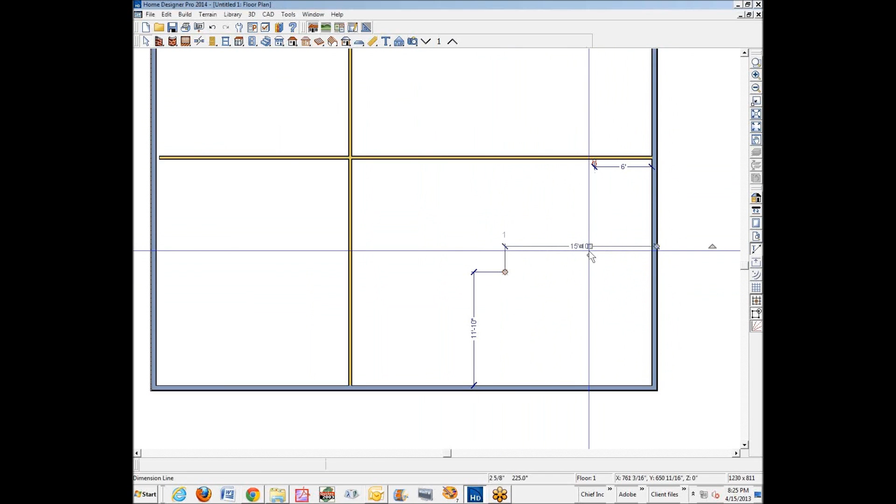I've just been playing around with it thinking about what I might do the video on. I'm going to zoom in over here and go to the dimension tools. I don't use the drop down, I use the point to point or end to end dimension tool here. You can see the little precursor there, the little triangle that shows me I'm on the center.

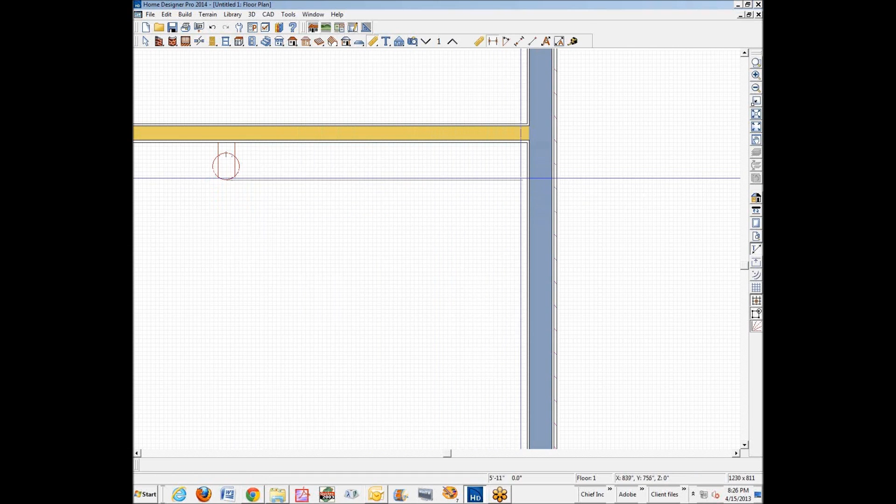I'm going to dimension - okay, I like the dimension to the outside. I'll just move it manually to the inside. Just the way the dimension tool is programmed.

You can see I preset that to 6 feet. You just click on the electrical item. If you want to move it to 12 feet, then you just type in the value and hit it, and it moves it to 12.

Like Alovia spoke of, you can click on the electrical item and select it, and then in Pro you have in the Edit toolbar this tool here, Transform Replicate, and you can move that selected item and copy it. Like the code is, I think, every 6 feet, something like that. Don't hold my feet to the fire if that's not true.

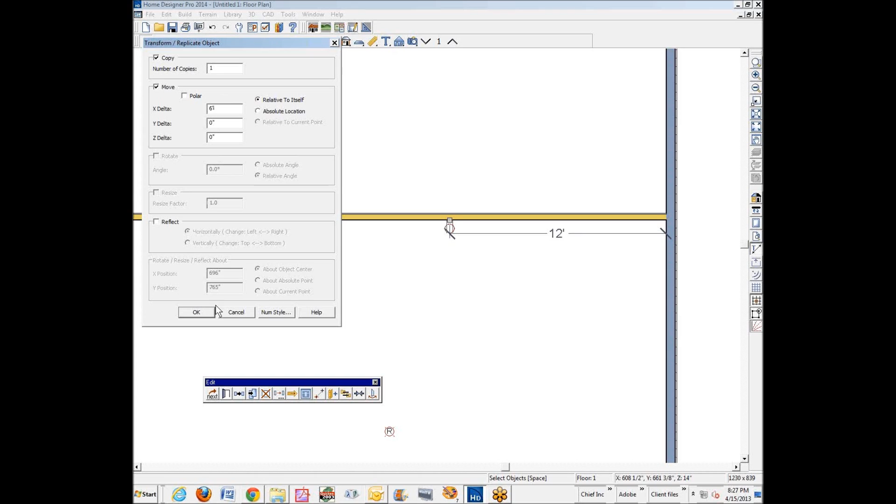But I'm going to make one copy and move that copy 6 feet - actually, I want to move it minus 6 feet. Yeah, and it moves it 6 feet to the left.

Now let's check the veracity of the software. We'll just move that over there. Yeah, sure enough, it's quite reliable and accurate.

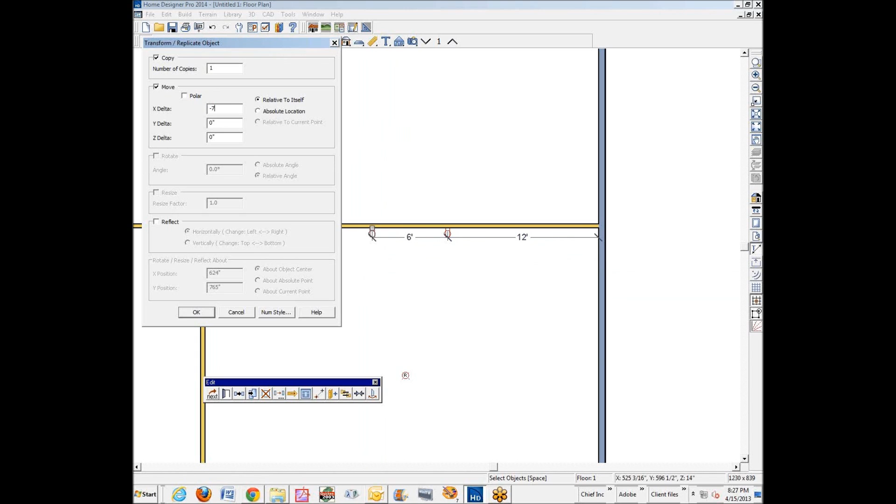So you could take the next one and make a copy. You have to check that, tell it how many copies, and then tell it how far, minus 6 feet, that's minus 72. We'll use inches this time. There's another one.

Of course, let me just get rid of these. Now for plugs, I normally just use the automatic plug thing. Let's see, I think it's under electric, and this one here, and it'll place.

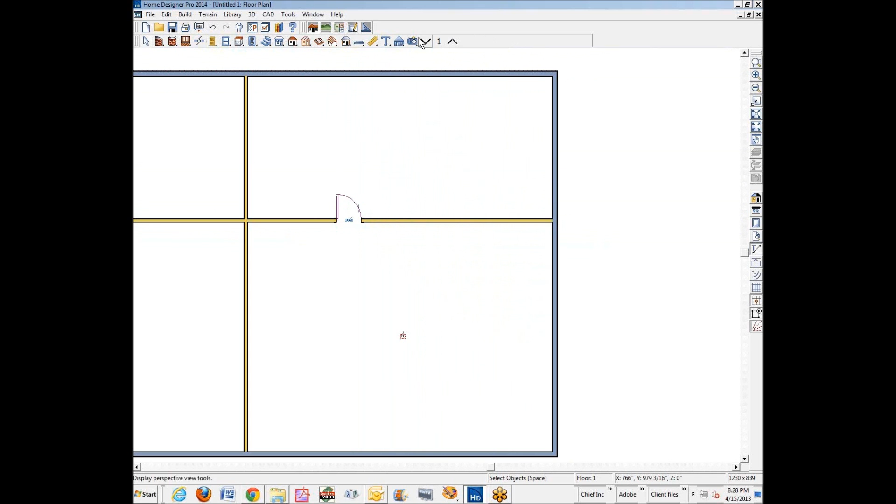Oh, okay, so there's no doorway. My bad, put a door in there. Now it'll probably work, I didn't know that there was that limitation. Probably a reasonable one. And it put them relative to the openings in the wall, and it put them in by code, by IRC code.

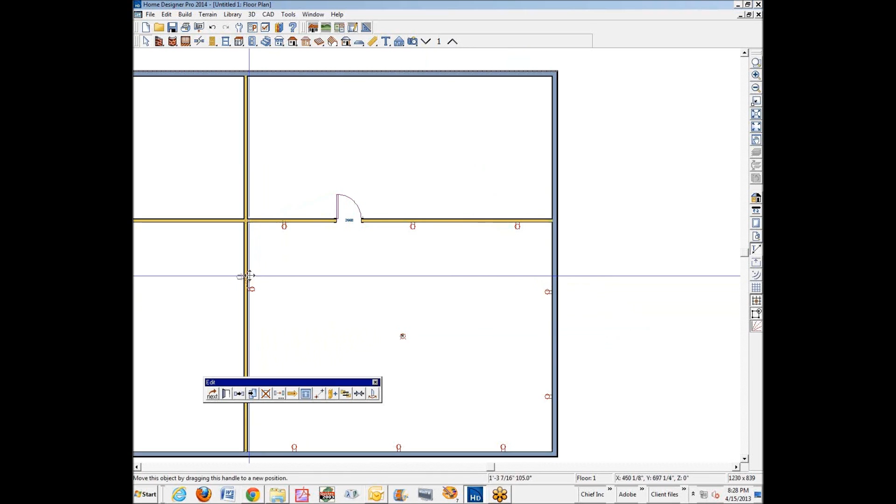Now, when you're doing electric plans, I'd recommend that tool. It's a time saver. And then if the outlets go in not exactly where you want, well then you can just move them to where you do want. Just keep in mind that tool lays them out by code, and if you alter anything too much, you're going to have to.

I told you to use the arrow keys, and I forgot in Pro the arrow keys don't work like they do in Premier. My bad.

So now, if you wanted to put this ceiling light in the center of the room, how are you going to find the center? Well, the easiest way, like Alovia said, and I agree, go to CAD Tools, draw a line. I'm going to turn off angle snaps just for a moment, and then draw a line from there to that interior corner.

Then another one - see a little red box that shows me that I'm on an intersection. There's the center of the room. That works really good. And then electric items like to snap to CAD lines. That's another reason why it's a really good idea to use them.

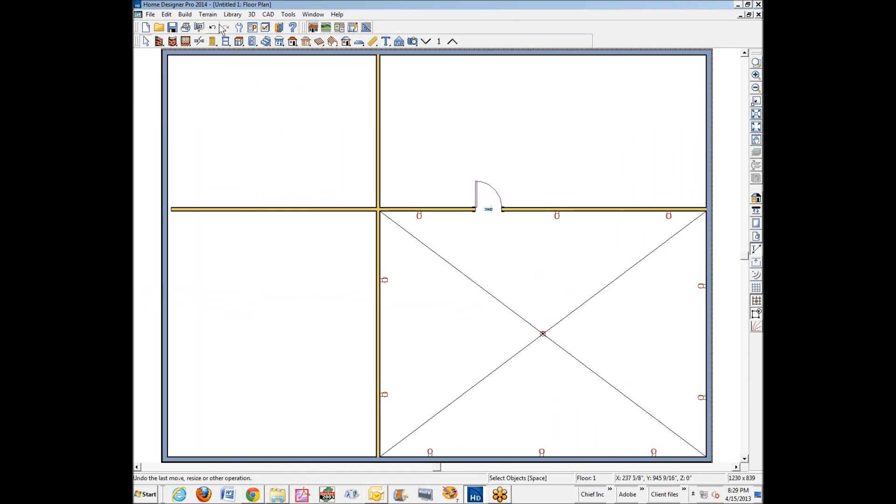Now if you wanted to lay out a room in a pattern, again I'd use CAD lines like Alovia recommends, and I would use the box tool here, rectangular polyline. You can snap it on a point and just drag straight down, and then let those snap on the corners - well, it's all right.

I'm off a little bit. I guess I need to - no, I guess my room's not perfectly - that's fairly close.

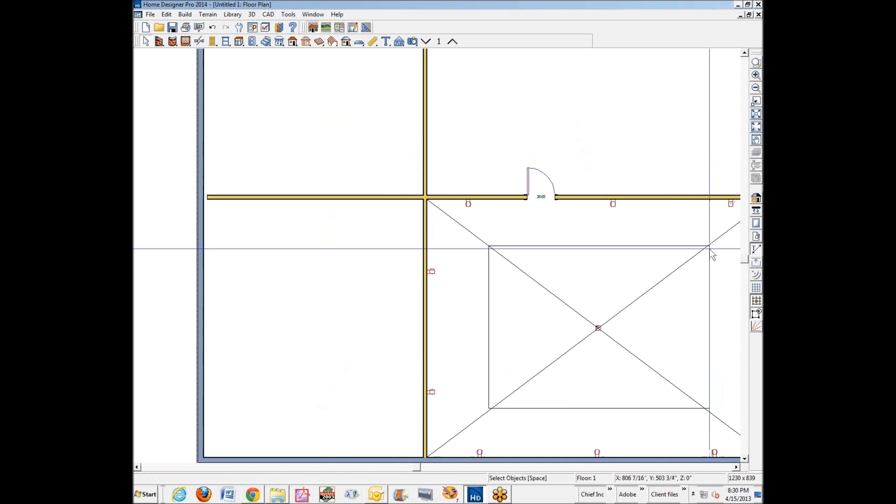Get this exact and snap it right on. See that little red snap precursor? I want to get it right on the line. There.

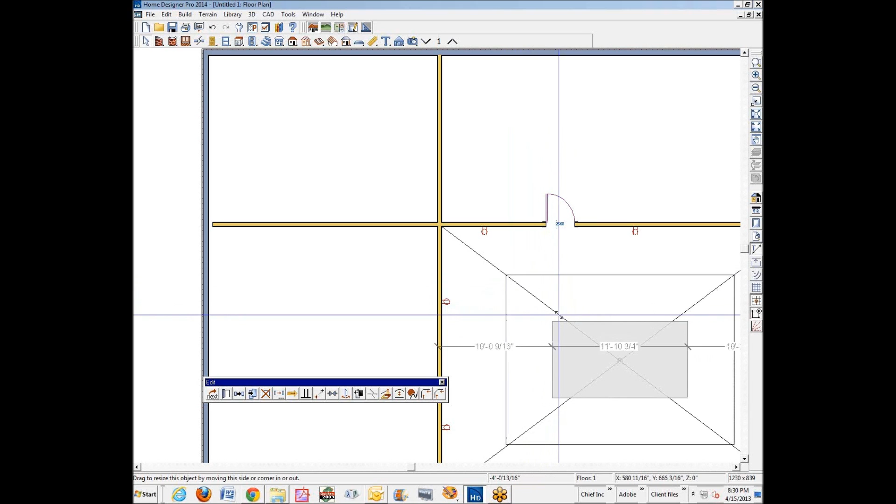Well, it's not perfect, but it's a quick way to lay out 4. Of course, I'm going to press the C key and then drag inward, and that concentrically moves the object. I'm just holding the C key down and grabbing a handle like that.

This is another way to do it. And you can take this one here and snap it to the corner of that polyline. Let the copy key - when you have CAD lines laid there, it's very easy and quick because they'll snap to CAD lines and CAD nexuses.

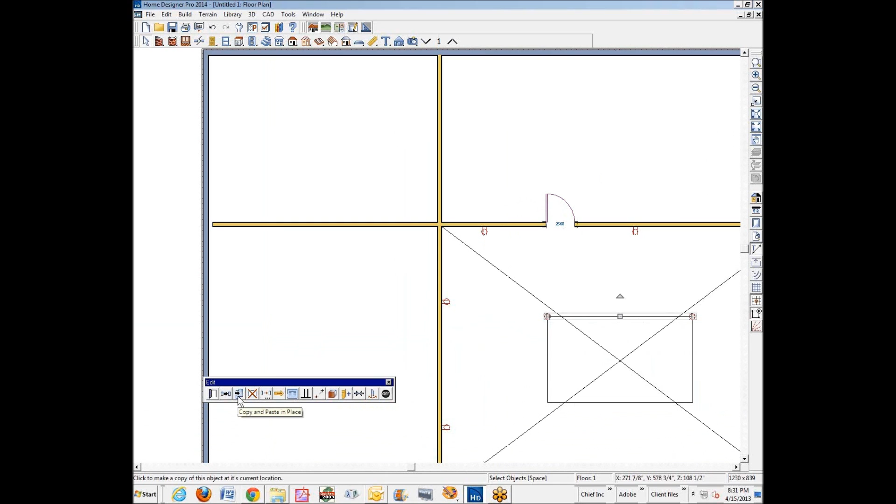Now I've got that group. I'm going to copy it in place and drag the pair down, let them snap on there. There's a pattern of 4.

Along with the CAD lines, as I mentioned earlier, you can use your dimension tools if you want to get it very precise and do an electric plan to show your electrician.

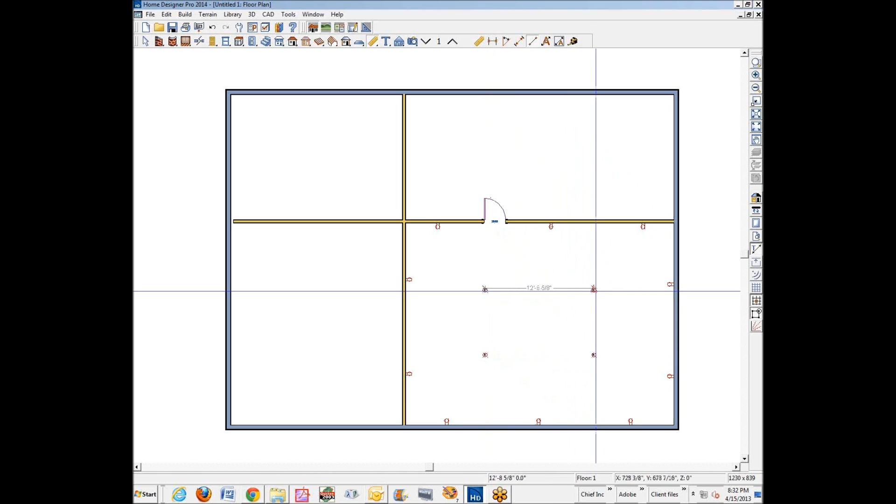Let me point out something about plug locations. The electrician lays them out by code, and on plugs especially, they're mainly to show the electrician where you need specialized things. You don't need to show every outlet because they would lose their license if they did an electric job and signed it off and it wasn't properly by code. You don't have to sweat blood over these electric plans because you're not licensed to create one anyway.

But if you wanted a dedicated circuit here, you'd want to go to the text tools and tell the electrician that right here. Now my arrow didn't work. Huh, it's not working. Okay.

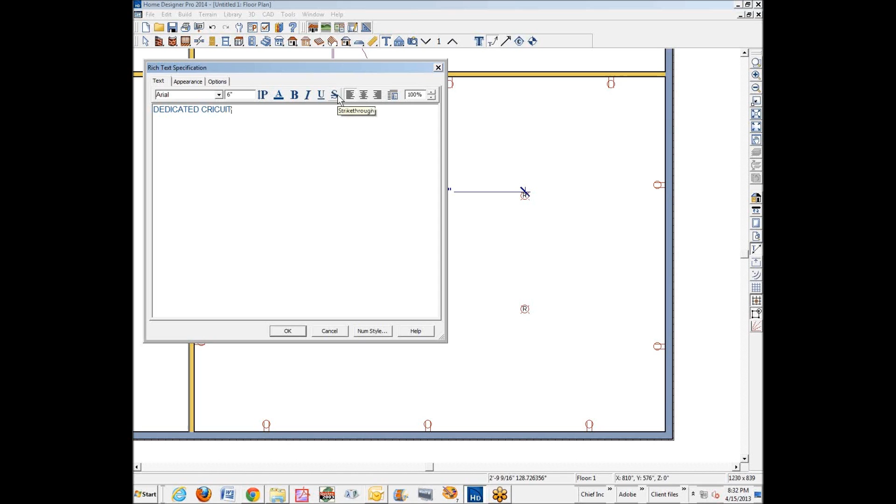Do all caps. I think I spelled that right. There's no spell checker? Well, forgive me if that's not spelled correctly. I'm spoiled, and I'm also stupid. Oh, there's the arrow. I didn't think the arrow formed right.

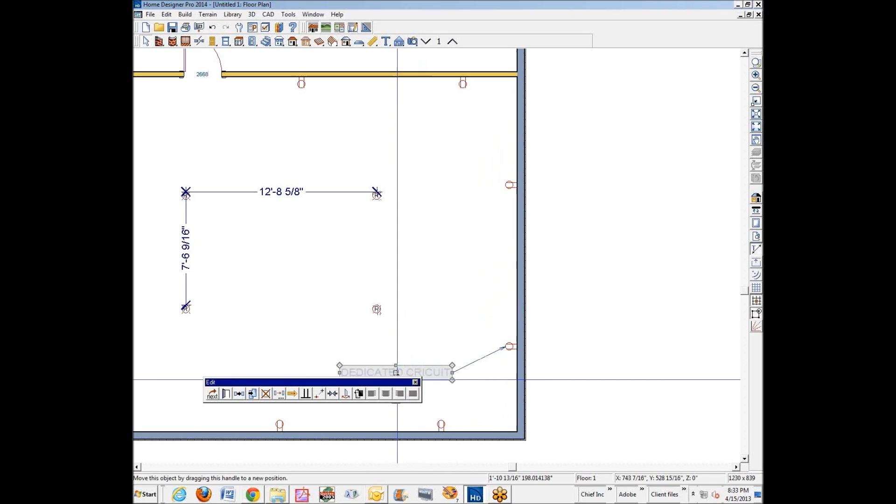I'm going to put the arrow there, and just for drafting purposes, I'm going to drag that down, click on this, use the break tool. I usually break mine into... well, I'm having a little trouble here. Well, I guess maybe that's the break. Okay, as long as I get a break in there, I don't care.

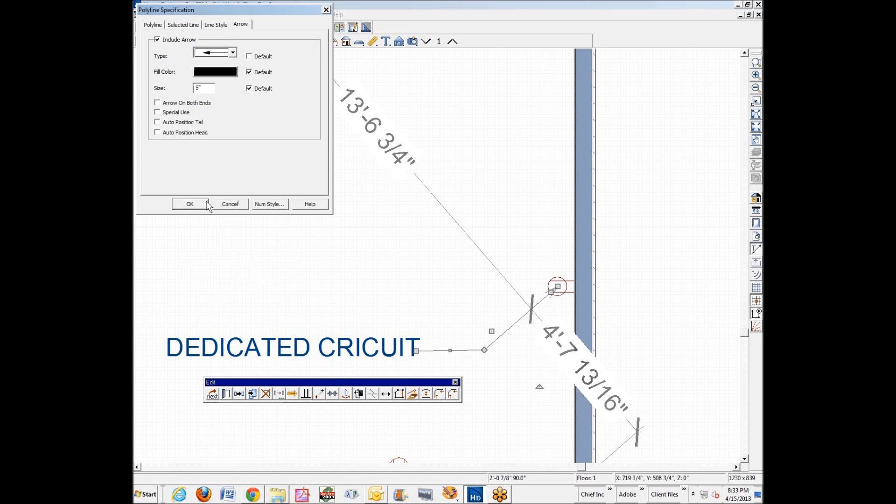I commonly will have a straight leader and then have the angled one go to the item. I don't like the arrow type, I'm going to change it to that kind of arrow. And also as a draftsman, I wouldn't leave this leader slanted like that. I'd use a parallel tool and straighten it up. That looks better.

So really you don't need to put your plugs in except where you need more than one or need a particular kind. Add some text and let your electrician know that's what you want. He'll lay everything else relative to that by code. Okay, let's continue on here.

I'm going to click on this dimension and drag and go to the wall. And then this little tool here, you left click and drag, create a new - well, it didn't work. Let me get that out of the way. Sometimes when things don't work, you just have to try again. I'm just not getting it.

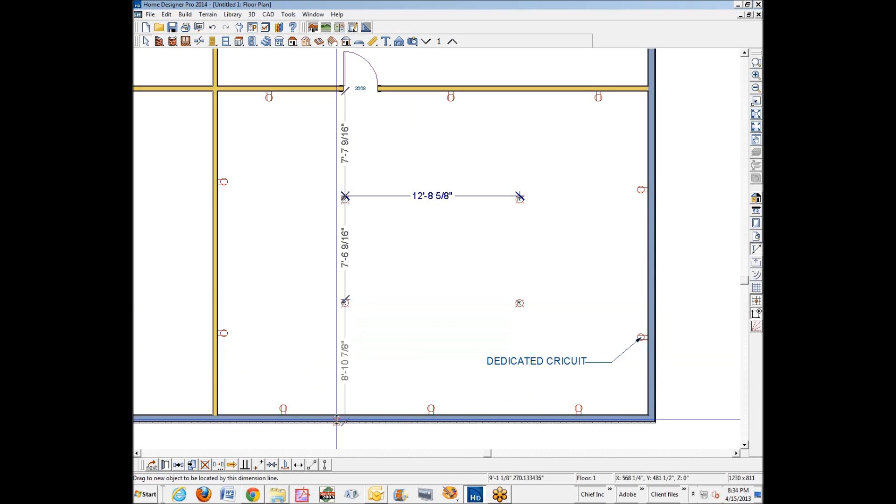It probably wants me to drag to the outside, which I don't want to do. Okay, it kind of worked that time. It went to the framing instead of the surface. I want to measure it from the surfaces. Okay.

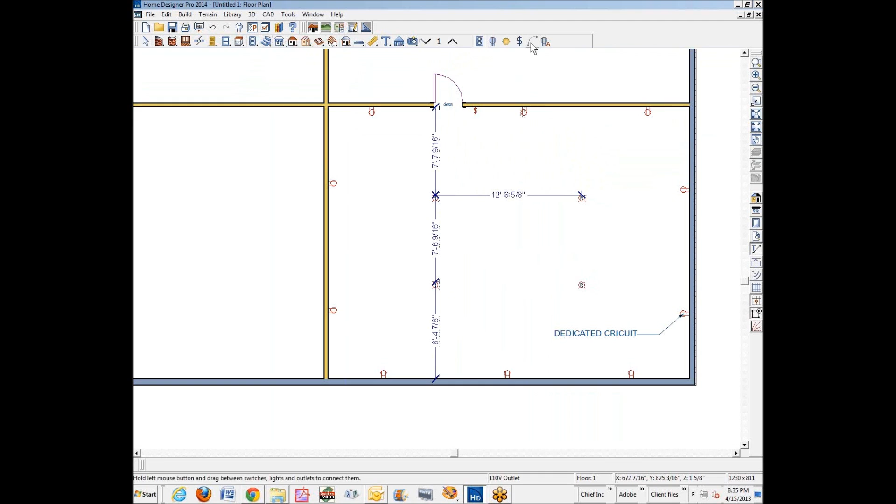So you can use dimensions, you can use CAD lines and CAD polylines, and electrical items tend to want to snap to that. I guess I should show you a switch. We'll put a switch over here by the door and wire it. Whoops, I lost it, I hit the space bar. Shouldn't have done that. We'll wire that to this circuit here.

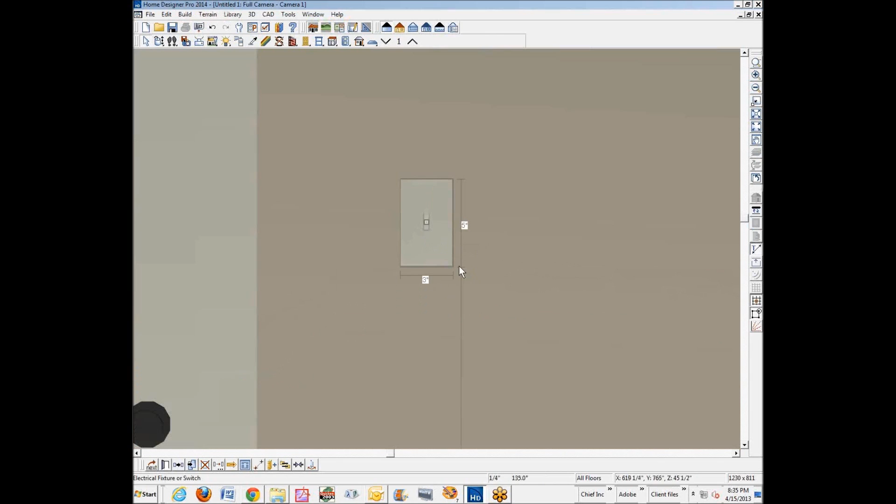Overhead lights - just left click drag, let it snap to the light fixture, left click drag. Okay, now let's look at this switch in a camera view and zoom in. Click on that and copy in place. And then, okay, yeah, I didn't know it was automatically going to do that. It didn't allow me - it's pre-programmed not to let them two be in the same place.

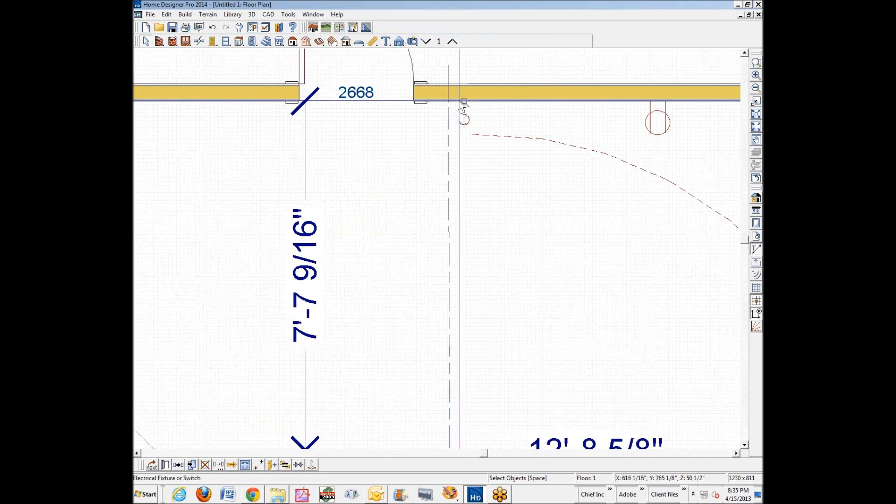So wait a minute, I don't see the other one. Where is it? Ah, okay, they were - okay, in camera view they weren't on top, but in plan view, they were in the same exact space.

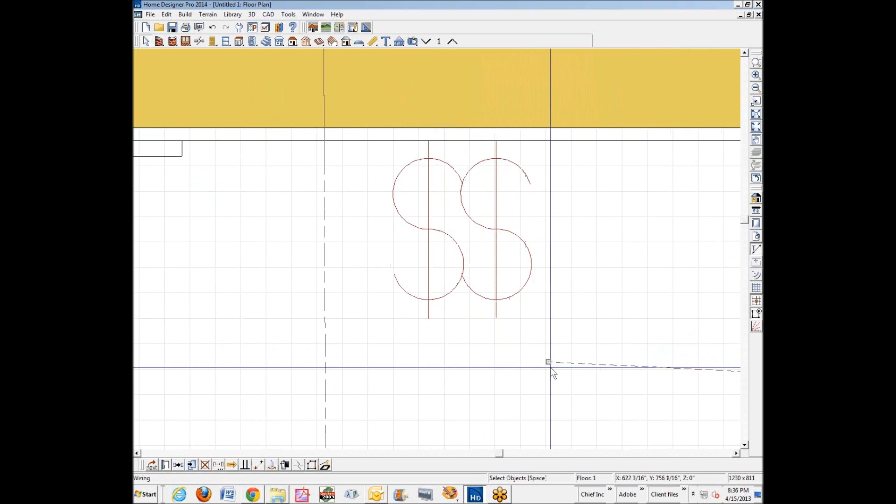In order to get them really close together, I'm just going to zoom in and hit the control key. I don't know, this is something I've complained to Chief Architect Incorporated about. These wiring things don't snap to the end like they used to in earlier versions. You have to actually zoom in and make connection, or sometimes you get a kind of disconnected look. That looks right in camera view.

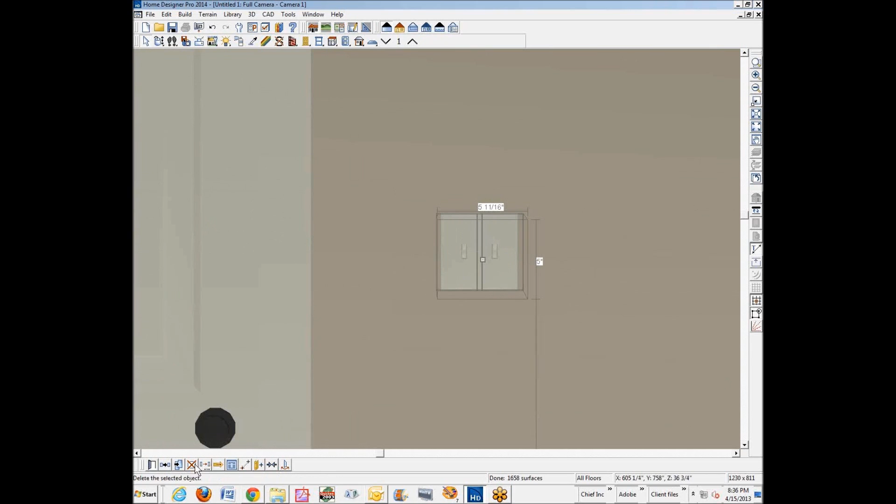Now if you wanted to do a stacked one, I'm going to click on that and shift select and click on them both and hit copy in place. I didn't realize it was going to do that, but that's okay. I'm just going to drag this down and then drag this one down. They do kind of group nicely.

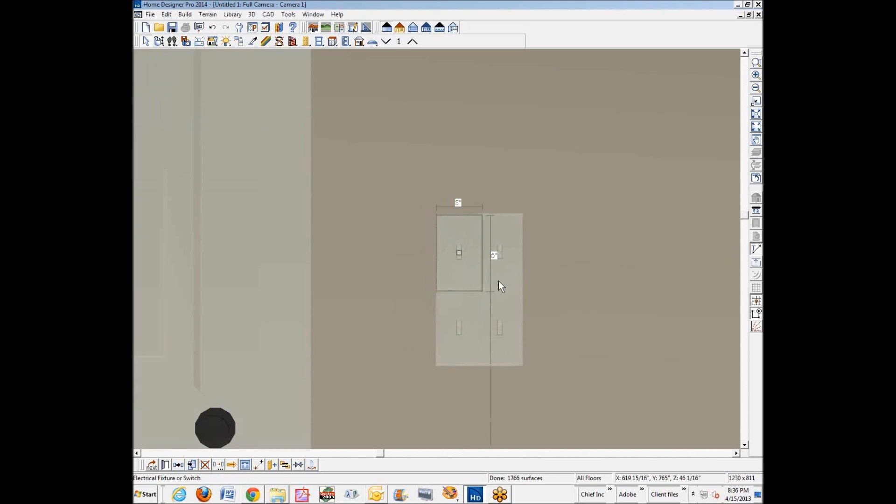I want them to match, so I'm just going to drag that over there, use the control key. That looks a little bit better.

Now this won't show up properly in plan view, it just looks like two switches, so you'd have to add some text saying that they're both doubled. But I've actually got - or if you just wanted, I'll delete that one and this one. If you wanted two stacked like that, see in plan view it's not going to show up, so you have to add some text to tell your electrician that they're just stacked.

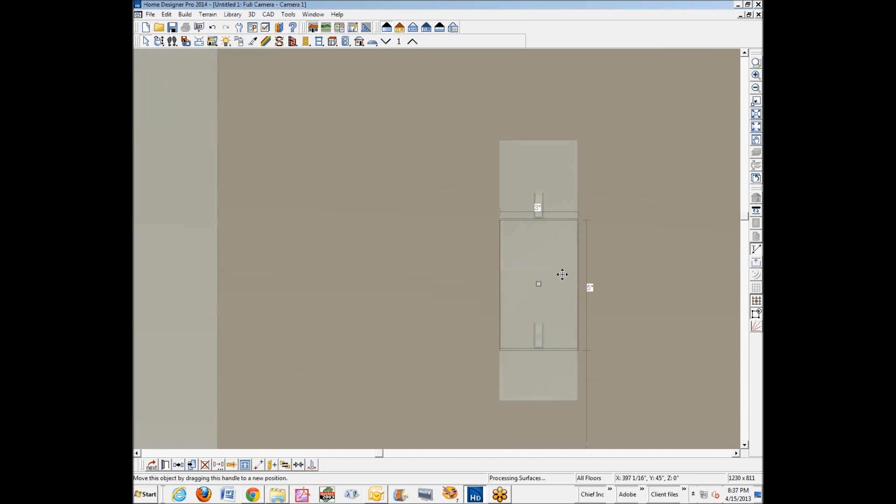I suppose I can probably stack these a little bit nicer. In plan view, you're going to have to tell the electrician that there's two there, and wiring-wise, it's going to be rather dicey. I think what I would do is move one out of the way.

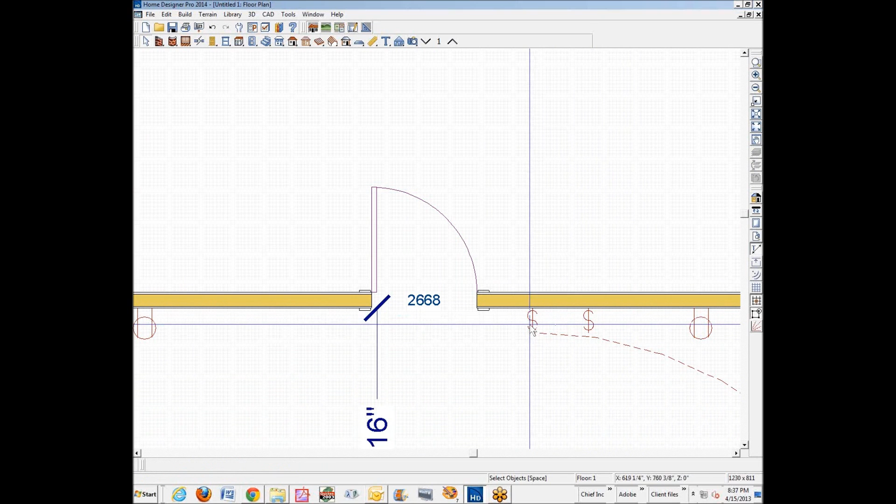See, this one has a wire on it. I'll move that out of the way and move the wiring a little bit. Now I'm going to wire this one. You need to have them separated like this in plan view to get them to wire right. And then we'll put a line over here to this plug, let's say.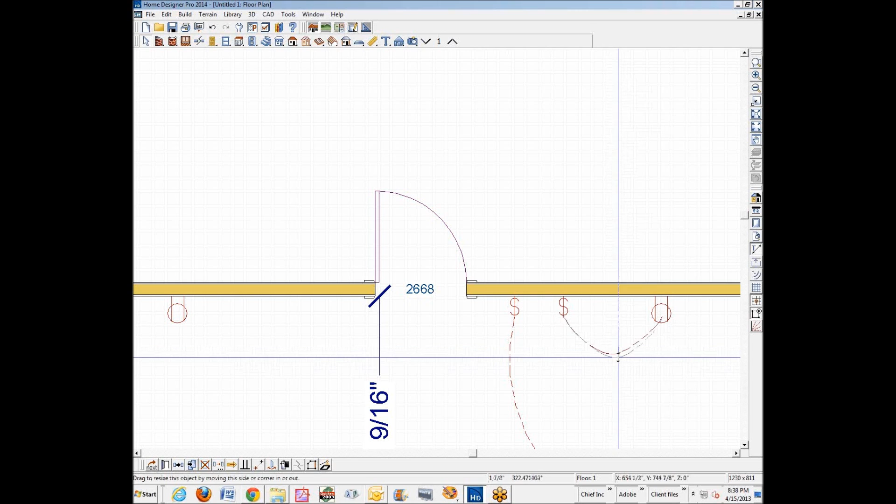These electrical connections are, of course, malleable, and you can actually put breaks in them. The break tool works on these connections if you need them to route differently. I'll put one more break in there just to show you that you can. Put a break there, then grab the break. So you don't just have to take whatever the software gives you.

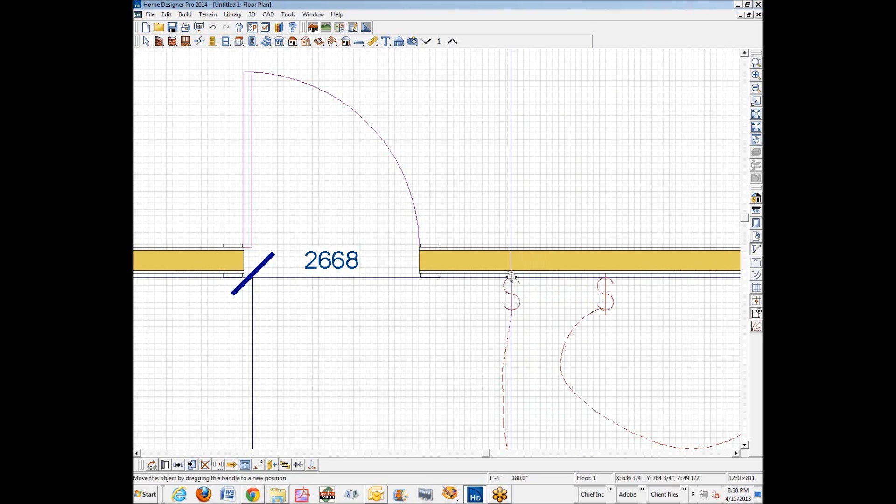Now, let's say this is supposed to be stacked, and in camera views they are stacked, but this would be confusing in a plan view. So you need to add an arrow and text saying that the switches are stacked. There's two switches there, and they're stacked.

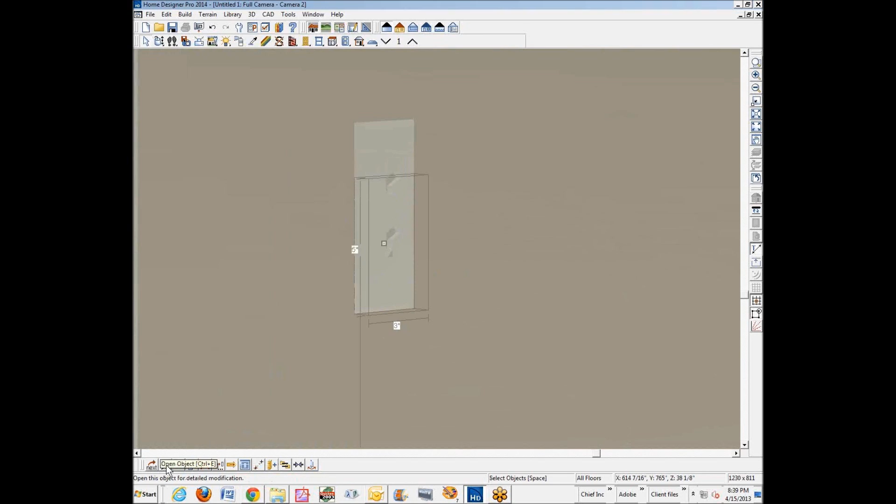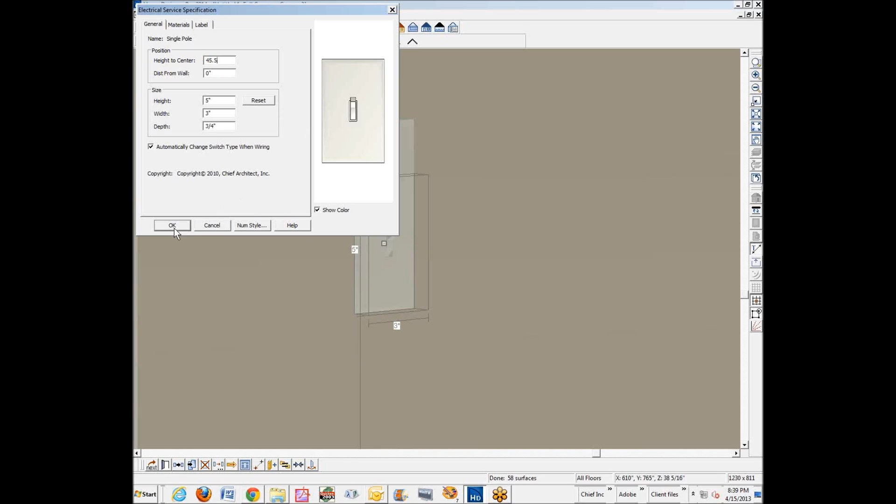Once you move them, they stay put. You can also open the dialog box, and it'll tell you the height to the center of the switch. That's 45, and this one is 47. I could get them a little closer together if I wanted—open the dialog box and set it to 45.5 inches, raise that up just a tad. So you get the idea.

Well, I think that's kind of what I wanted to accomplish. Oh, there's one other thing—some of you guys want to do an electrical legend in Pro and other programs. The way I did it in Chief Architect Premier, back before we had electrical legends and schedules, which you don't have, is I took an invisible wall.

I've got angle snaps on—let me turn angle snaps off, or I won't be able to draw anything straight. Okay, and then you can put a series of items. You have to have a wall for electrical items—some electrical items won't snap anywhere except to a wall, like plugs.

Now, this light fixture, I can create it away from the wall and then drag it over close to the wall. We'll do a sconce—there it is. Hit the light and then click it. See, it puts a sconce. You click right next to the wall, it creates a sconce.

And if you don't want a sconce, then you have to drag it away from the wall. I'm going to move that over just a little bit closer. Okay, that's good enough, you get the idea. And then you can add text items over here—we'll call it a duplex.

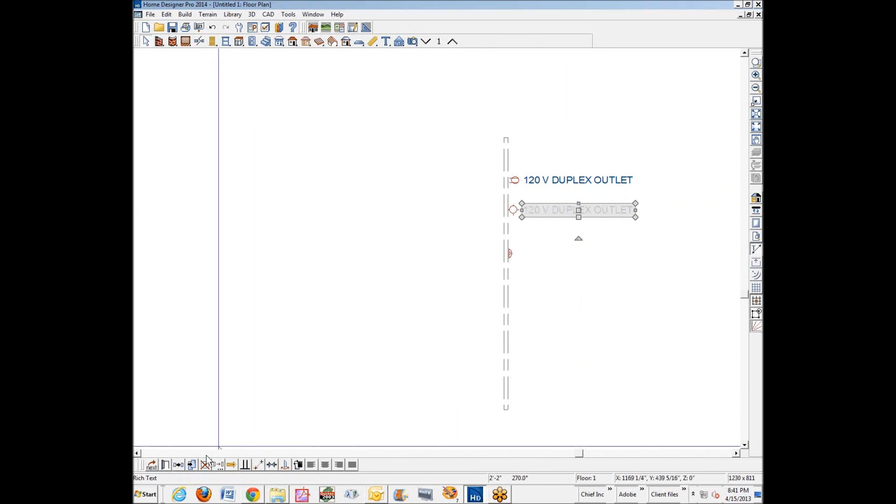This is how you can make an electrical legend: use an invisible wall and then put text out here. I'm going to copy that, drag it down, open it and change the text, and so on. Then, before you send this to layout, you could go to walls, invisible, and turn that off—I think the electrical things would stay.

Where's walls invisible? There it is. Yeah, see, the electrical stuff stays, but you need a wall there for some of the electrical symbols to stick. Then you could gussy it up a little by going to your CAD tools if you wanted to—put a border around it, add text up here saying electrical legend, if you wanted to. It just depends on what you think looks good. Put that line there instead of the wall, and you could also add lines.

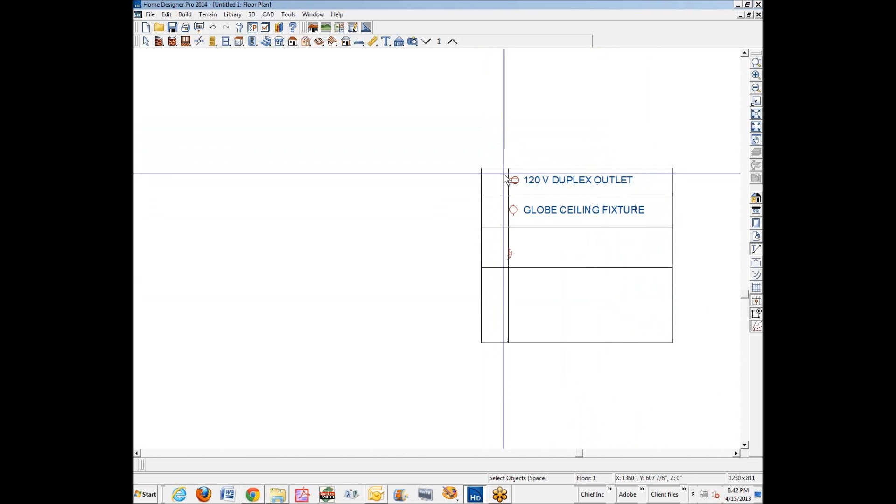If you wanted to—you don't have to. So that's where you can make an electrical legend for your plans, and just add your symbols, add the text, and then send it to layout at a scale.

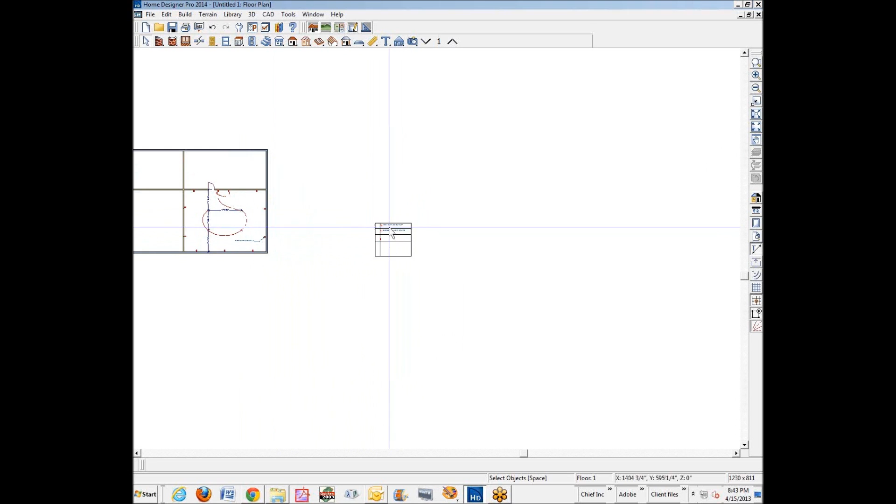And you could have this in the same plan with your other plan. I think the way I did it back when is I had a plan named Electrical Legend, and I would use that for all my plans and then send it separately to the same layout page. It worked fine. If you want to do exterior renders and so forth, then this wouldn't be a good idea—you would want to have it in a separate plan, but you get the idea, I think.